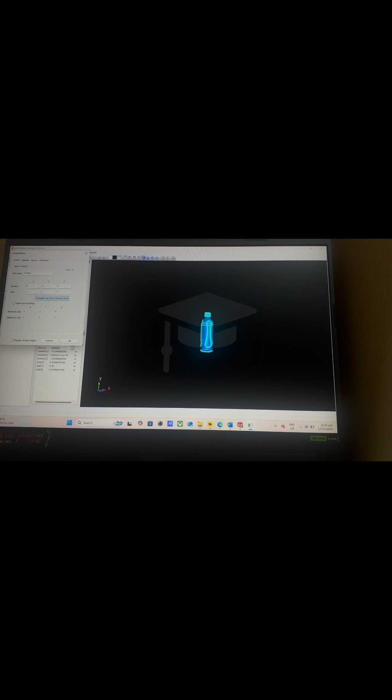And then create parts, cuboid, calculate size. There. Let's look. Preview. Okay, that's done.

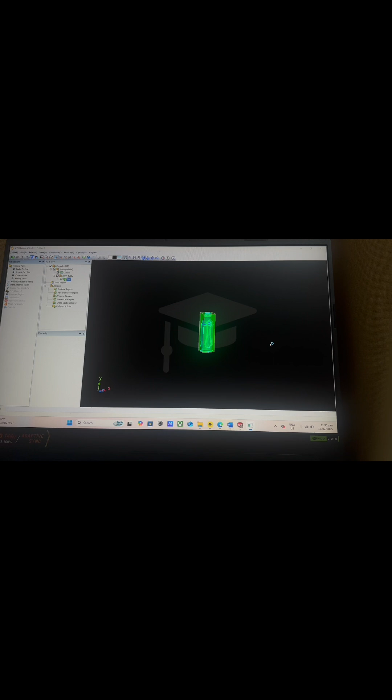And then let's go to build, let's check our measurements, it's okay. And then build analysis model, okay. So build analysis model so we can open these functions.

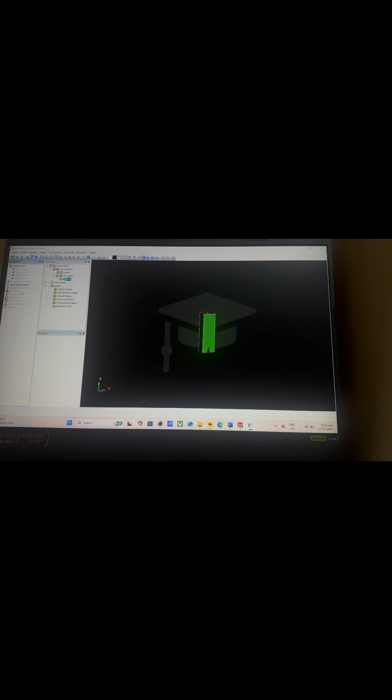And it's almost done. It's not yet done. So, after this, let's set the material of the bottle, of the cuboid, and that's okay, part material for cuboid, that's gonna

be fluid and compressible. Here, air, apply. And for part, that's gonna be obstacle. No, let's use solid. And since it's a bottle, it's

gonna be rubber or plastic. No, insulator, glass. Let's say it's glass. So, the glass. Okay. And then, we've set the material.

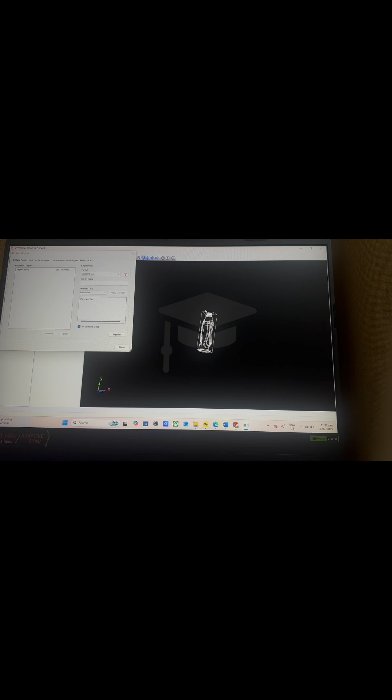This time, it's gonna be the region. So, our region for this one, this is gonna be the inlet. This part would be the outlet.

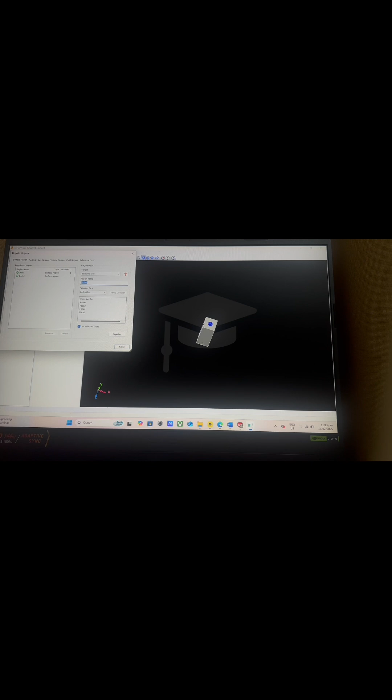And this one, these 4 sides are gonna be the walls. Oh, no, not this one. Walls. And then let's close this first.

Let's select this part of the cuboid so we can add a region just to the bottle itself. Okay, so let's hide that. And then register region. Oh my god, so many.

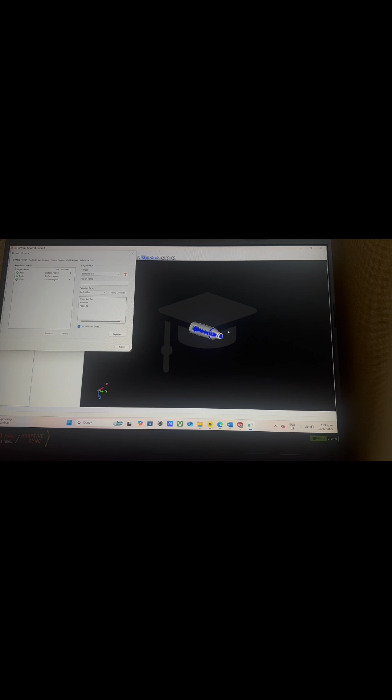I think this selects all faces. Let's just do it by part. Select part, all of this. No. Select part. This part here, that's gonna be the bottle.

So let's register it. No. Wait, why does it say empty region? Bottle. Wait, it's just region. So, face, wait.

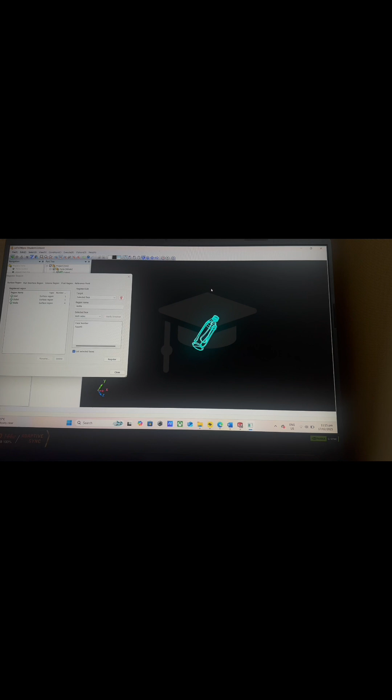So let's select it by face only. So let's select all the selected faces of the bottle. So, okay, this is gonna be a lot.

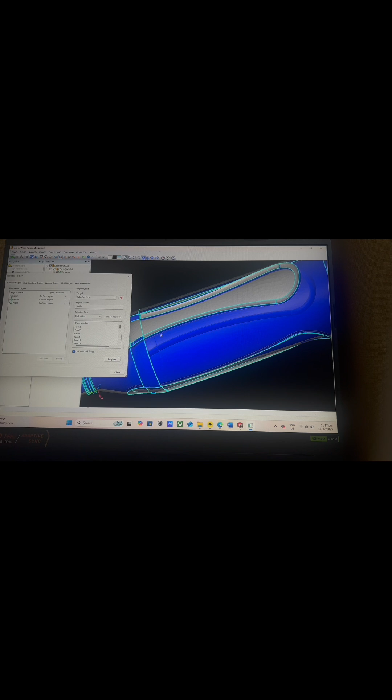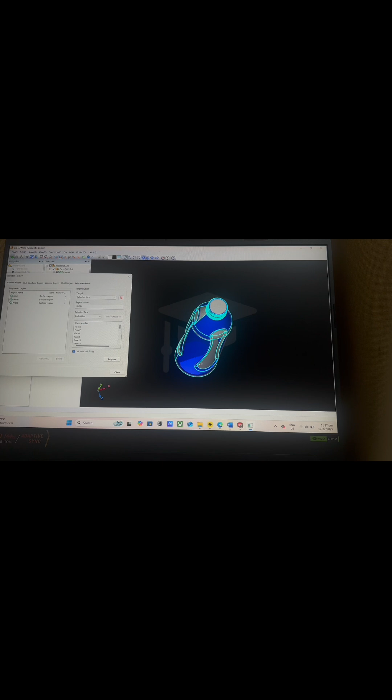This design is too complex, but it's almost done. I think that's it.

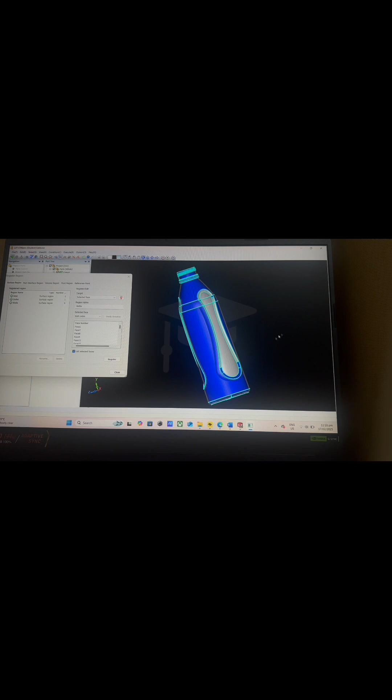Yeah. So let's register it. So we have our inlet, outlet, walls, and bottom. So let's show all of it. And then this time, the numerical region, which is the cuboid.

So new cuboid, numerical R. So inside of the cuboid, this one, calculate size, preview. Yeah, the arrows here, they're not too visible. And then, close the conditions.

This condition is where we set if we want it to be supersonic or subsonic. So the normal velocity earlier was 250. Now let's make it

380 meters per second. So let's set that, and then the outlet, our parameter here would be the total, the static pressure outflow. Let's set that for the wall boundary.

It's gonna be free slip. Yeah, free slip. And then for the output of field file to surface data, let's output the wall shear stress vector. Next, and then the output of list file to output surface force, and then finish.

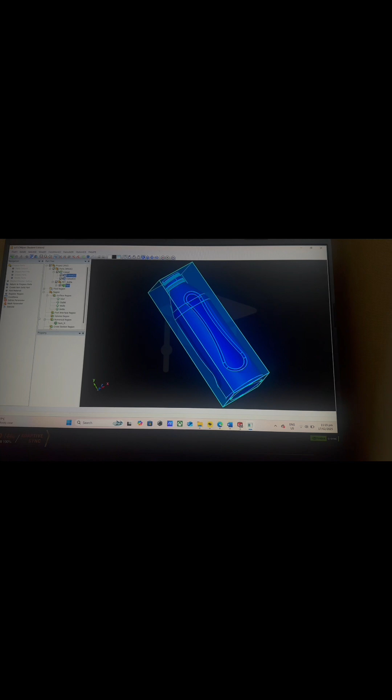So this time, let's do octree. So let's just create that. And then okay. And then let's mesh now.

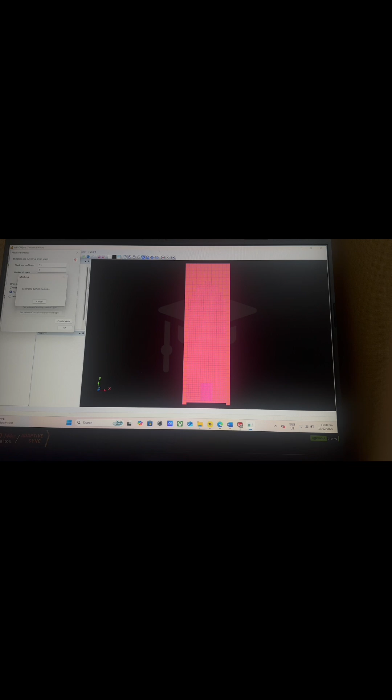This is the standard, so create mesh. This would take a while. But yeah, that's it. Generating surface meshes. Okay, it's complete now.

And then let's press OK and then execute. Let's execute the solver too so it goes directly to the solver. So, execute. Oh my god. And then here's the convergence status.

Too many elements. Oh my god. It's processed by... Okay, so it has an error. And it only detected 1 cycle. And its time per cycle is 7 seconds. So this is not accurate.

But yeah, this just shows that I don't think scFLOW can accommodate that complex drawing of a bottle. So, yeah, that's it. So we won't be able to proceed to the post-processor.

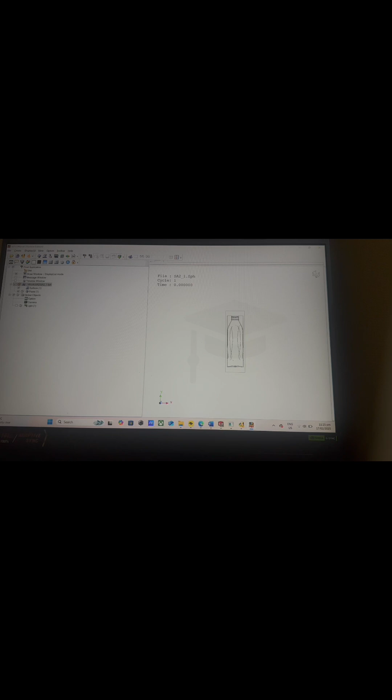Okay, let's try the post-processor if it's possible. Yes, so we don't have solver or convergence status. Wow, but it seems it can do it here. So let's try the surface.

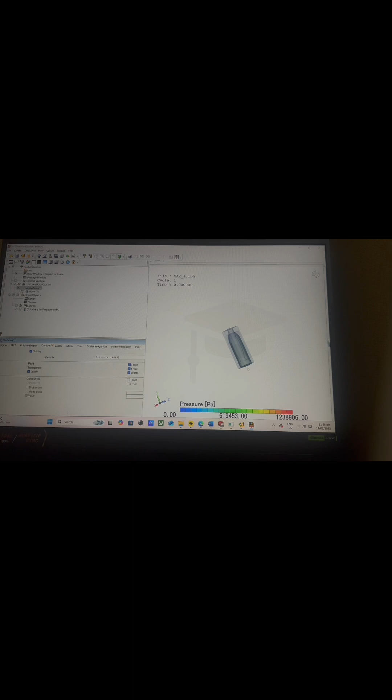So let's see, let's go to contour, display, and pressure. Okay. Wow. Water.

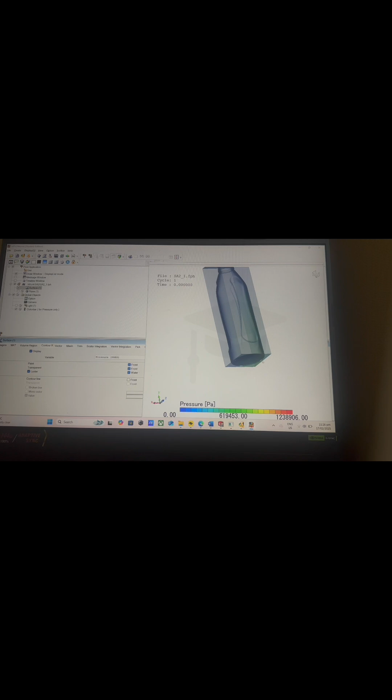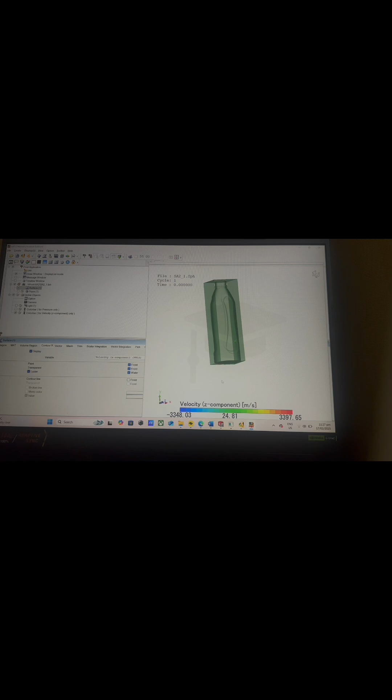And then, for the velocity, we have the velocity here. So the velocity throughout is here, in the middle. It's not too low, it's not too high. So, that's it. Bye.